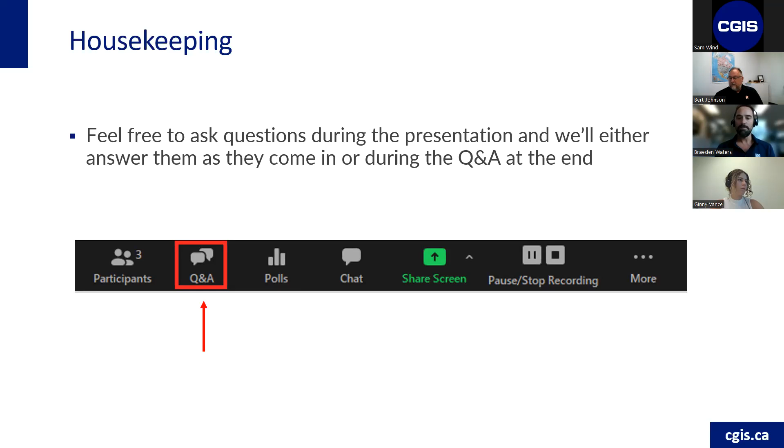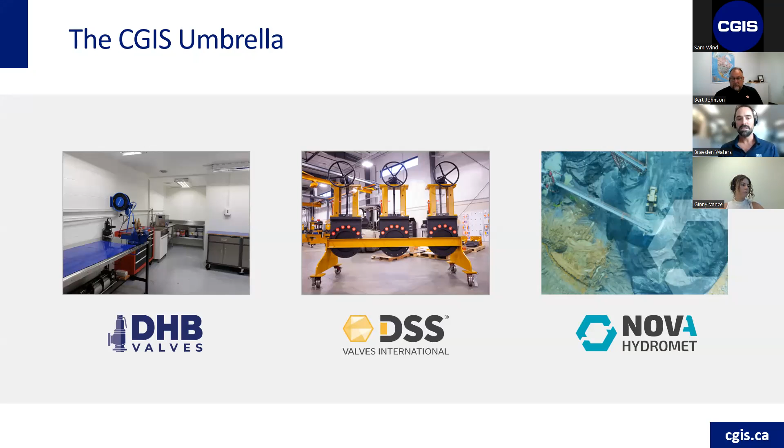Next screen, please, Bert. Just a little bit about CGIS. Our vision here at CGIS is a world without valve problems. Within our mission statement, we look to be the trusted control, isolation, and automation valve partner, and the recognized leader in providing powerfully intelligent solutions to our customers' severe service needs. Further to that, we look at delivering superior reliability and significantly improving customers' bottom line safely. I think safely is one part that we really want to focus on in today's presentation with the way we approach our customers. So this presentation will definitely look at some safety aspects with valve operations, and we'll be focusing on that. Next slide, please.

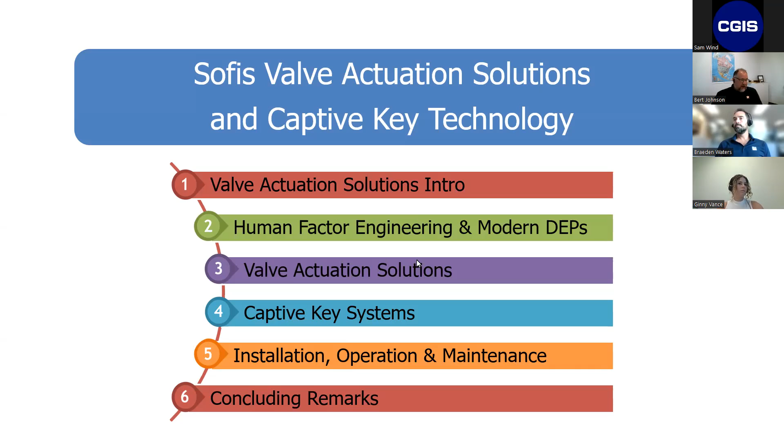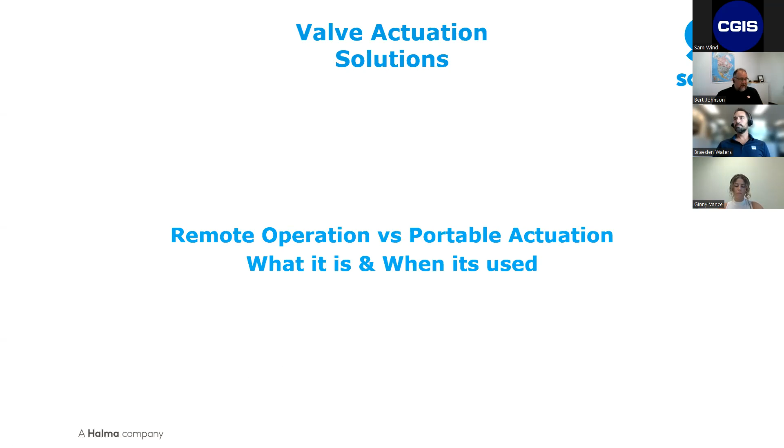The first thing I want to say is that there are two different veins on our drive system applications. You've got remote operation, which is moving the operation from an unsafe or ergonomically unsound location to a safe or ergonomically correct location. And then there's portable actuation, which is actually physically actuating a valve easier and making operations a little easier to operate that valve.

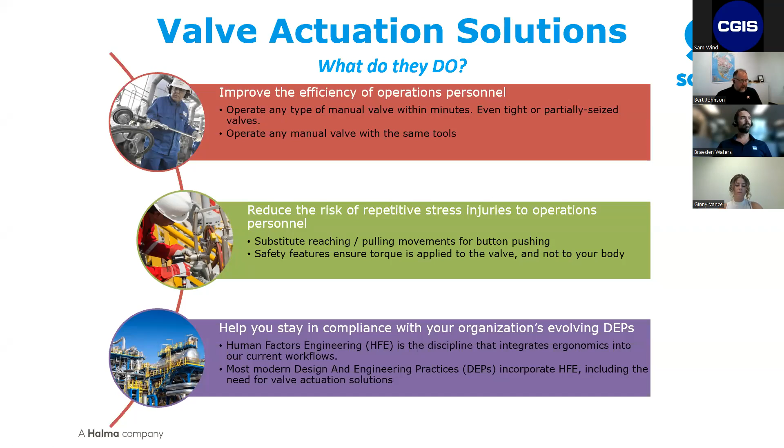What does this technology do? It improves the efficiency of operating personnel and reduces the risk of repetitive stress injuries or awkward position injuries that could come into play. It also helps with the changing workforces, with everyone evolving their design and engineering practices around human factors engineering and some of the other current buzz terms in the industry. This helps create alternatives to that kind of application.

What are the current DEPs?

Everybody has a standard, and I'm sure within your respective companies and organizations, there is a standard practice for operation of different things, whether it be valve or ergonomic use of space. In some cases, it's even as simple as how desk components are set up. But what we do is we take that and we utilize it in an industrial marketplace.

In some of the DEPs that we have reviewed, valves are set up as critical, set up by their criticality, which is related to the frequency of operation, the criticality in the operation, and the size and need of operation of that valve.

In that, people will determine whether it is a very critical valve, which either needs a direct dedicated actuation device, or whether it can be used with a portable actuation device. And then it goes down to where there might be an infrequent operation where there may not be that much of a need.

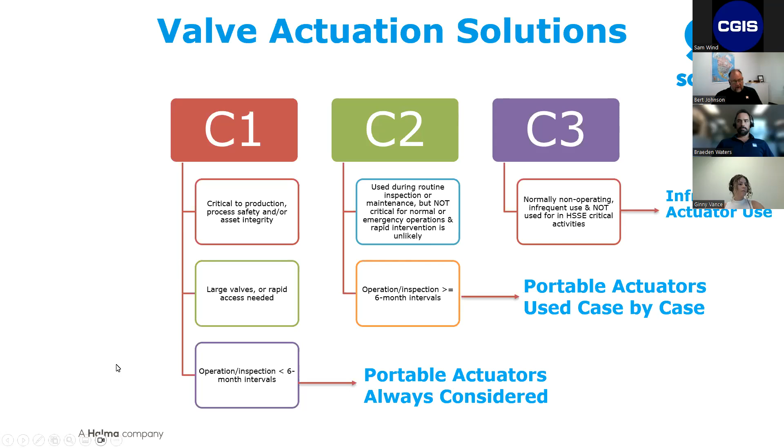One of the things that a lot of people will look at is, and I was raised in the industry, like Braeden said, I've been around since the 80s, and we always operated off of a 100-pound rim pull cracking force or operating force. That is the amount of force exerted on the outside rim of the hand wheel.

All of this information was pulled from existing DEPs, and currently the only way that you can get the 100-pound rim pull that's listed here is only when you're breaking that valve off the seat. Once you start operating it, then it is suggested of a 33 pounds of force applied to the outside rim. This at first caused me a little concern because it seemed extremely low.

But if you put that in the perspective of what your company has as a minimum solo lifting weight, most facilities use 50 pounds as their guideline. So when you put a 50-pound limit on how much you lift, then it makes more sense to put a 33-pound limit on how much force you can exert on the outside rim of the hand wheel.

There's also mention in some of the manual valve design and operations and process of how many turns you have to utilize that. Most people look at 100 rotations. So if you've got a valve that exceeds the amount of force you can apply, but you put a 10-to-1 gearbox on a valve with 40 turns or even 20 turns, then you've just exceeded that number.

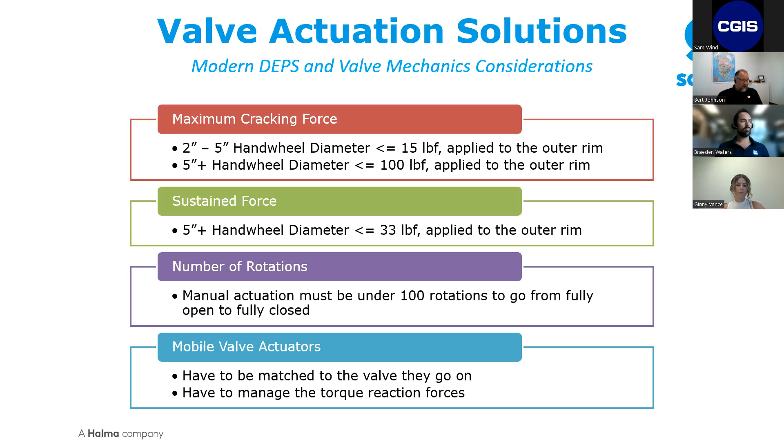And then how you manage any torque or reaction forces is also critical in that piece. What you will see, and again, this came out of a physical DEP from a major player in the industry, we are looking at only being able to exert 33 pounds of force on the outside rim of the hand wheel when we are actually following it through.

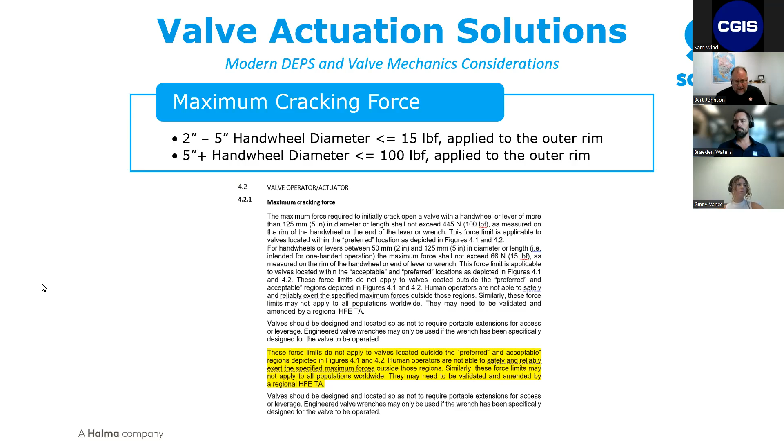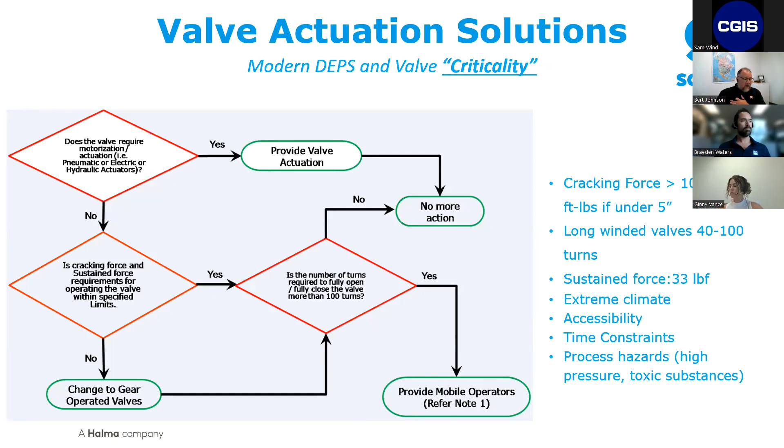One of the other pieces we look at, and I don't know how every other customer is done, how your specific sites are done, but a lot of people are starting to move away from the concept of chain operators because of an inherent risk of either being directly below the valve itself, or having to deal with the potential of the chain operator to fall off or slip, or any number of things. So people are starting to move away from that.

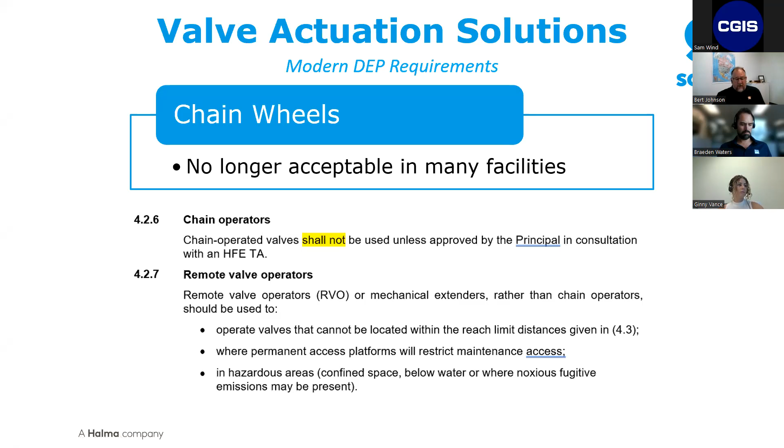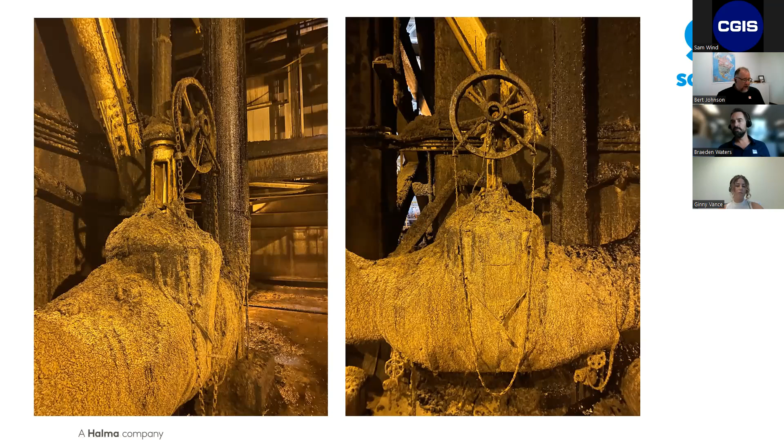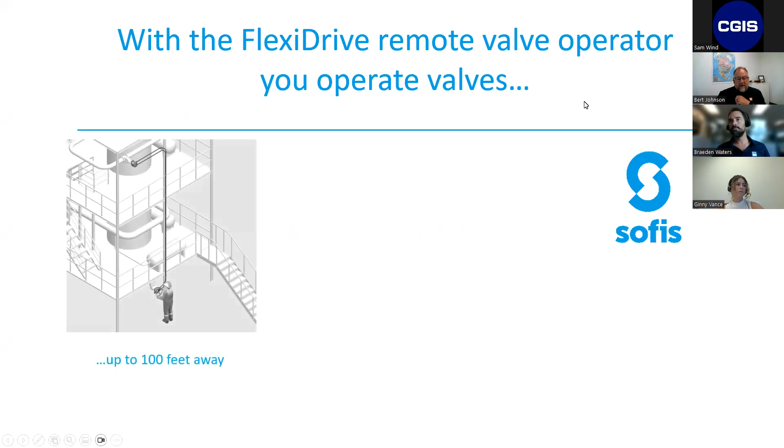The FlexiDrive is actually an alternative to the chain wheel. It doesn't replace every chain wheel that you've got, but it does give you an alternative that allows for you to get out of the potential harm's way. We can be up to 100 feet away. We can go through walls and other types of barriers. We can even have submersible where you are below grade, which in a lot of cases you don't see the capabilities of a chain wheel to be able to extend to these other applications.

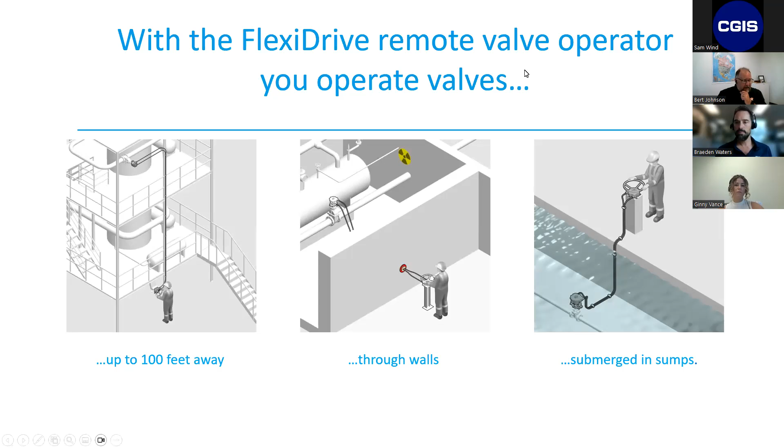This piece of equipment is made up of three main components. You've got your operator station, which is mounted in a location of your choosing that can be either on a pedestal, on a concrete wall, on a handrail, wherever it's operationally convenient to the operator to be in the proper ergonomic position, as well as out of a splash zone or harm's way of any kind.

And then you've got the valve station, which is a direct mount onto the valve, allowing for that operation. Essentially, we are replacing the hand wheel for that operation.

Then you have what goes between the two, which is a flexible cable. It is a helical cable. The easiest reference I've always had is boat steering - there's a Teleflex cable that goes between a center console and the rudder. What this does is the same thing as fly-by-wire or drive-by-wire technology.

It is a direct link back to each other. And this is a much more robust and sturdy cable that allows for operation in an industrial environment.

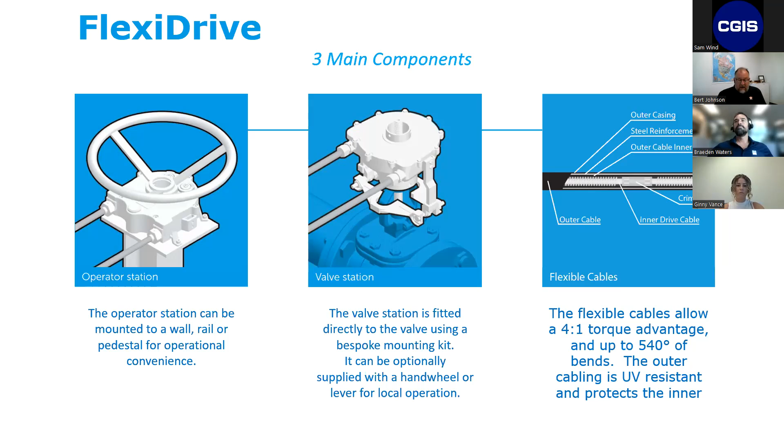We do have indication, which if you are not in line of sight of the valve, you will have an indicator on your operator station that allows you to know where that valve is in its position.

Everything is fitted in a bespoke manner that allows for almost a belt and suspenders, because essentially what we've done is replace the hand wheel and fitted the operator station in the exact same way the original hand wheel was, whether it's with a nut or some sort of a bolt-on assembly. And then we also have an additional assembly at the bottom that allows for a belt and suspenders type application.

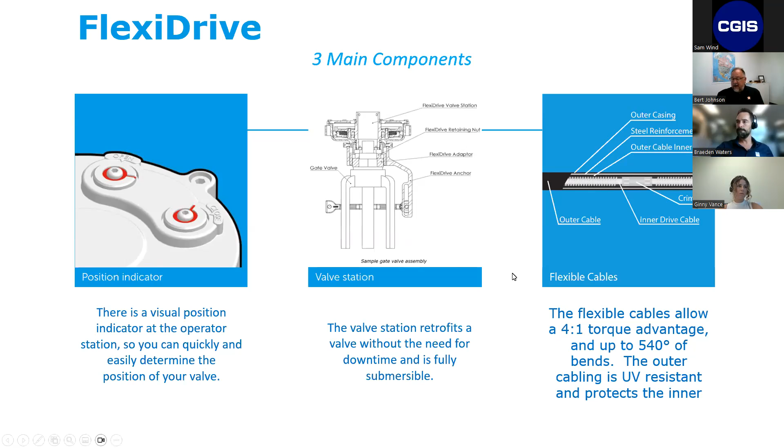This next slide will show you essentially how the FlexiDrive operates.

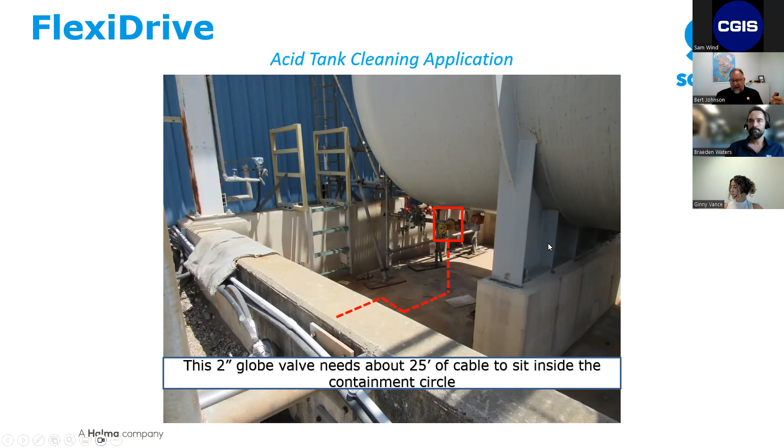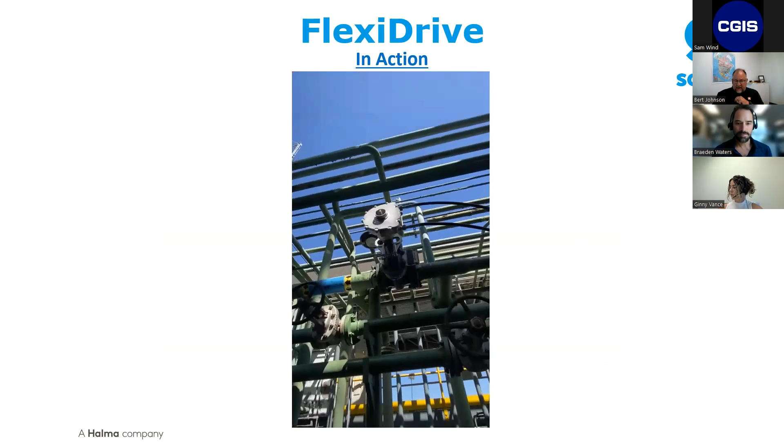And you can see the cable is wound. It's not intended to be cable tray neat. It's intended to be free flow. Valve's going in the open, but it allows that operation.

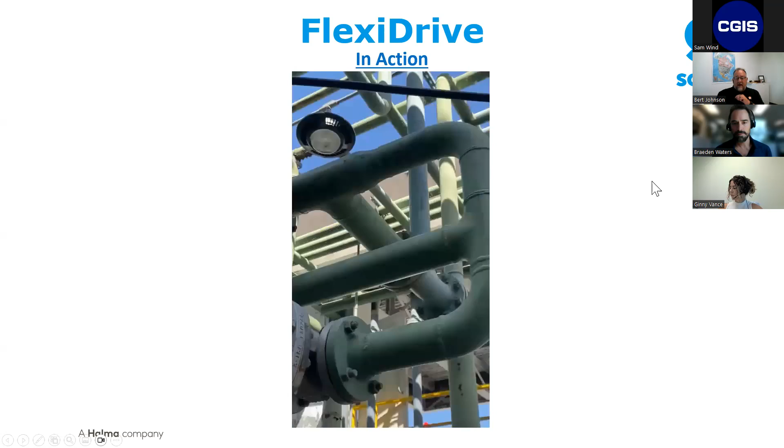You can see how sturdy that is on the valve itself. There is no flexibility that it would indicate that it could fall off at any given time. And that's how our FlexiDrive operates.

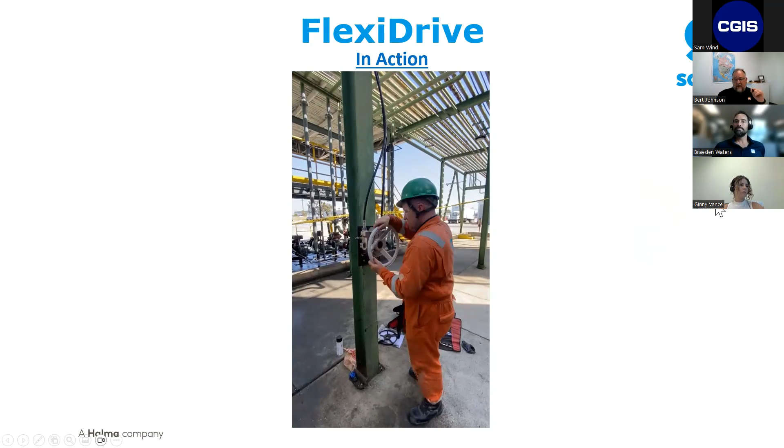What we'll jump to now is that was remote actuation. That was the operating principle that gets us to move the operation to a safe or hazard-free area or ergonomically safe area.

What we're going to move now to is what we call portable actuation. These portable actuation devices, for valves that inherently don't meet the criteria for dedicated actuation, what we can do is make it a little easier.

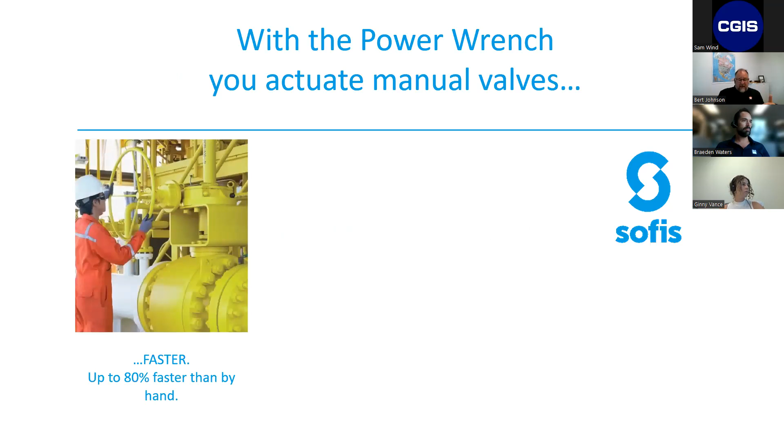And what does that look like? That means that a single individual can operate a valve with a much quicker operating time than anything else. There's no need for cheaters, chains, helpers, and it's a single man operation.

With our power wrench, you can see that it's set up as a safety mechanism because there's a dead man switch in the center, and then there is a throttle on the end to allow you to control the air supply going through the tool.

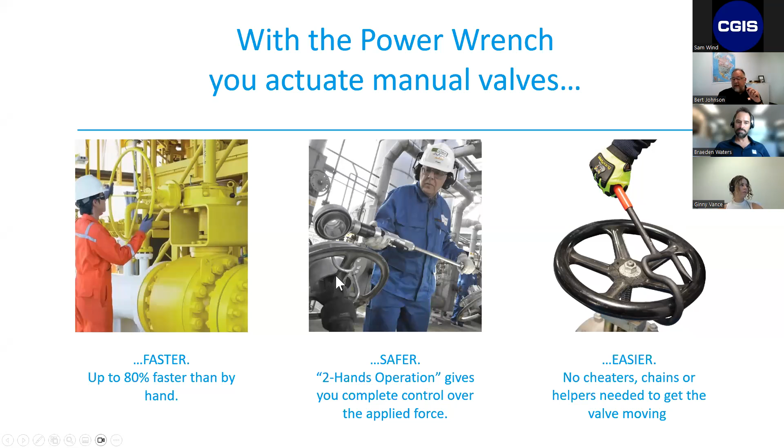So what that does is ensure that you are in a proper stance and properly prepared to operate the power wrench. And the power wrench, you can see right here the very tail end - this is what we call our drive plate adapter, and it is a simple bolt-on to the existing hand wheel.

And this is what it looks like. And again, we have a few different sizes depending on hand wheel dish, hand wheel size, and stem rise that allows us to accommodate different applications.

And so there's your operating mechanism, and that's all it takes to operate this piece of equipment.

Then you have your protection skid or a filter regulator lubricating pack, which has adjustable air supply. You can hook up plant air to the outside edge, and then you can adjust that air supply to be able to operate that piece from there.

And then you have the tool itself, which comes with a hand guard and protection items to help ensure safe operation of the tool. The tool is capable of putting out close to 400 foot-pounds of torque, although on most manually operated valves, 200 foot-pounds is usually the listed requirement that you would need.

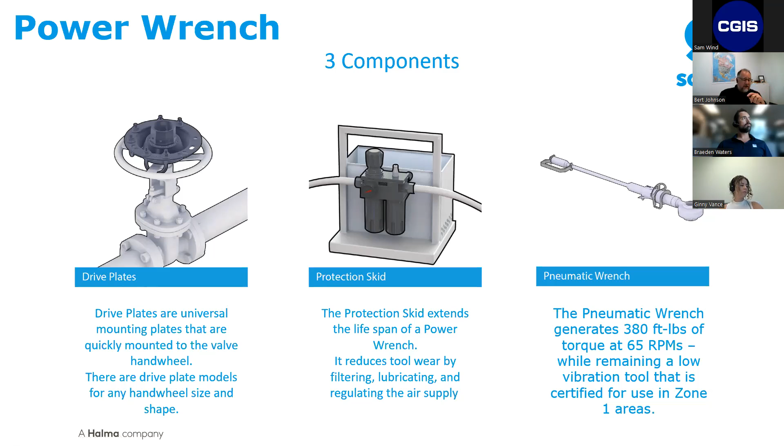Sam, if you could go ahead and do the second question, because it really could apply to both the power wrench and EasiDrive, since it applies to our drive systems and making life easier for the operator.

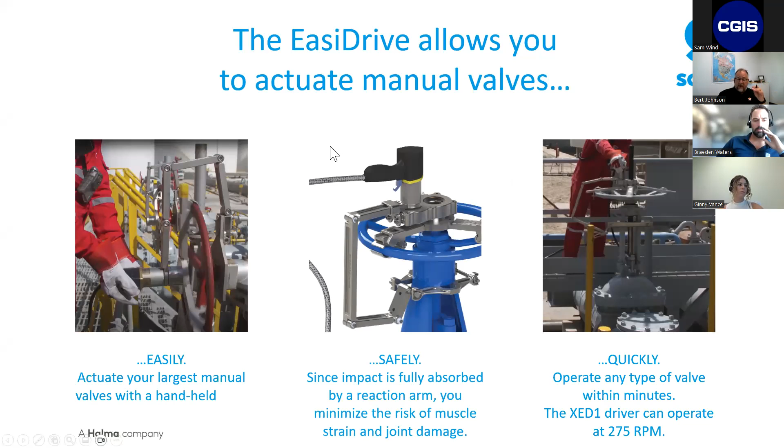But what we've got is the EasiDrive is a more identifiable, easier application because it has a reaction component built in, and it's as simple as carrying a hand tool, similar in size and functionality to an impact wrench, but with some safety aspects built in, out to the valve and operating it quickly and easily through various operating mediums, including electric, battery, and pneumatic operation.

Here's how it works: the reactive components come into operation when the valve reaches a stopping point or exceeds the torque the tool is set at. Rather than those reactive forces going into an operator's arm, shoulder, or other body part, they're reintroduced into a stable, secure location so there's no risk of injury to the operator.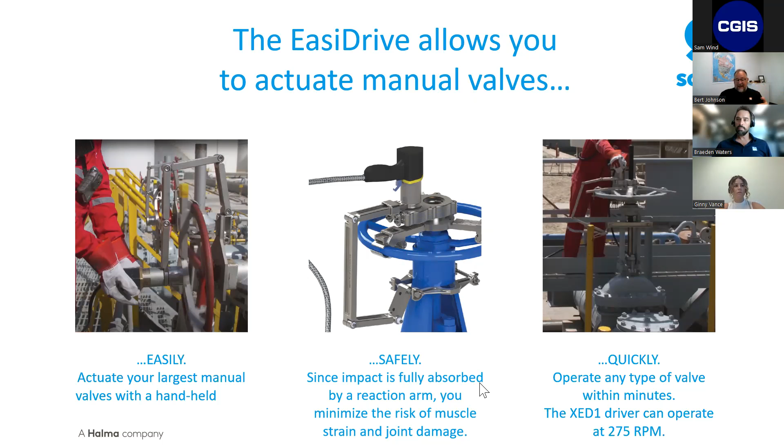We normally see this used in applications where detailed engineering didn't call for a dedicated actuator, but there might be a requirement where two or three operators have to go out and operate an individual valve. So this takes that operation and simplifies it considerably.

The tool can be mounted either directly onto the top of the valve, or we can fit it to the hand wheel, a gearbox, or whatever piece is necessary. The key is having this reactive component installed so that should the tool seize up for any reason, all those reactive forces are exerted back into the valve, making it a safe, single-handed operation for an operator.

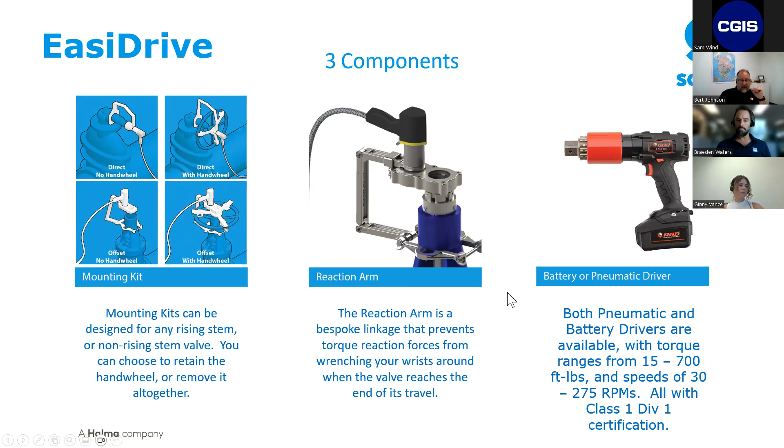We can exert up to 700 foot-pounds of force with our pneumatic tools, and up to 500 foot-pounds through our battery tool. Our battery tool is currently certified by the manufacturer up to Class 1 Div 1, groups A, B, C, and D. The next slide will show you how the EasiDrive works.

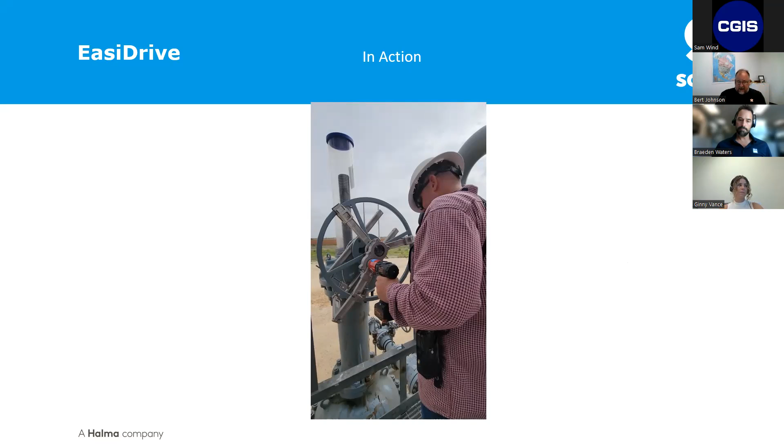This is a one-man operation, and you're not going to see the full operation here, but it would be a much shorter operation than doing it by hand. That's what we try to do - make the operation of these manual valves, which are either high torque or have had the torque lowered by an auxiliary gearbox, easier, even though it still increases the number of turns, so you might have a great deal of turns on that valve.

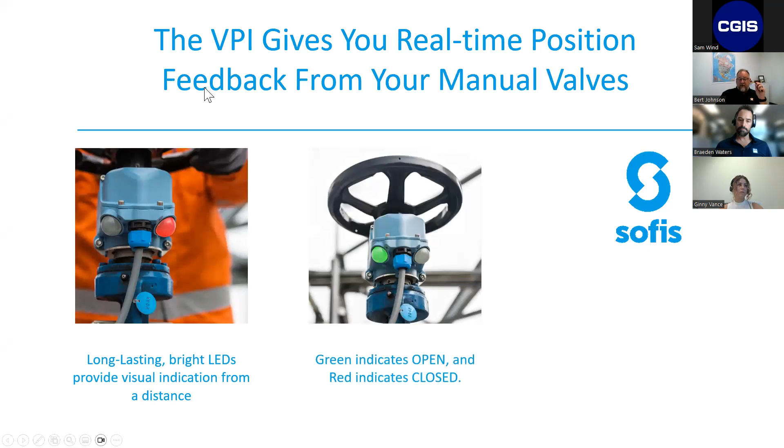And this is the last piece of what we call our drive solutions - our VPI, which is our visual position, valve position indicator, designed for multi-turn valves. What it allows you to do is, without having to put separate targets on a stem or any of the other...

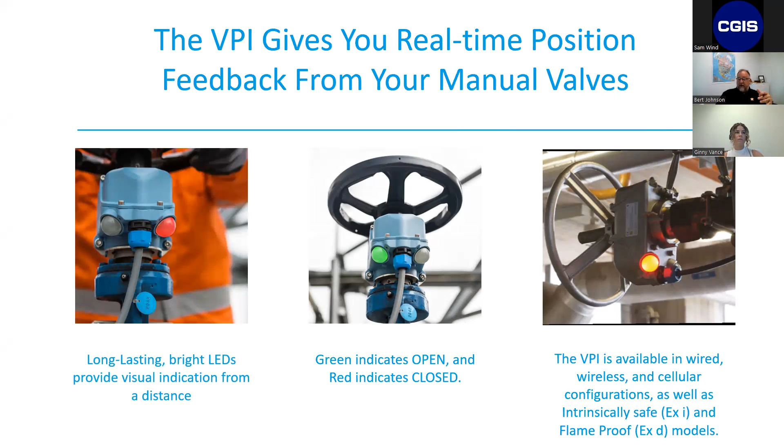...creative engineering that's been necessary in the past, this allows you to mount a single piece of equipment onto the top of the valve and retrieve indication back on the operation of the valve. It comes in either aluminum or stainless.

All of the switches we can provide - I believe we've got up to 14 different switches - carry full certifications. The box is a general watertight box, but we can add an explosion-proof junction box at the bottom that would allow it to fit in any application you might need.

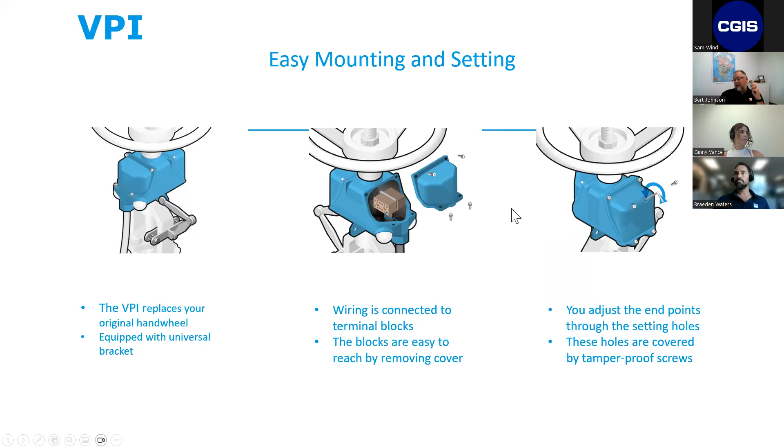Now we're going to step out - sorry, Bert, just one quick question came in. How long does it take to set up the EasiDrive mechanism?

The EasiDrive mechanism - I have done this as a demo, and I know some of the CGIS team has been doing some demos lately with some of our equipment. I've gotten to where, with my kit, I can usually set it up in 30 to 40 minutes on a valve.

The intent is that when you use that technology, you'll have an adapter kit for every valve that's critical to you. You might have one or two extras that you can install for turnarounds or something like that. But the intent is that all of these adapter components are already there, and the operator just needs to walk up with the tool and operate the valve.

It usually takes about 30 to 40 minutes to install the reactive component onto the valve. I hope that answers the question for whoever had it. Perfect, thanks. The next piece I want to jump into is moving to our process control.

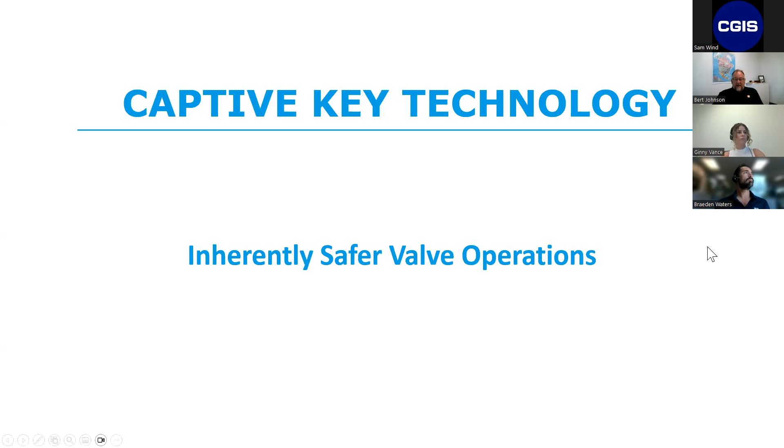What this concept does is take a manual process and control the operation, whereas lockout tagout, or a standard car seal or LOTO program, allows for operational control of a single valve. What this technology allows for is process control over a breadth of valves that can be up to 10 or 15 valves long or more. The level of control is up to the site specific persons.

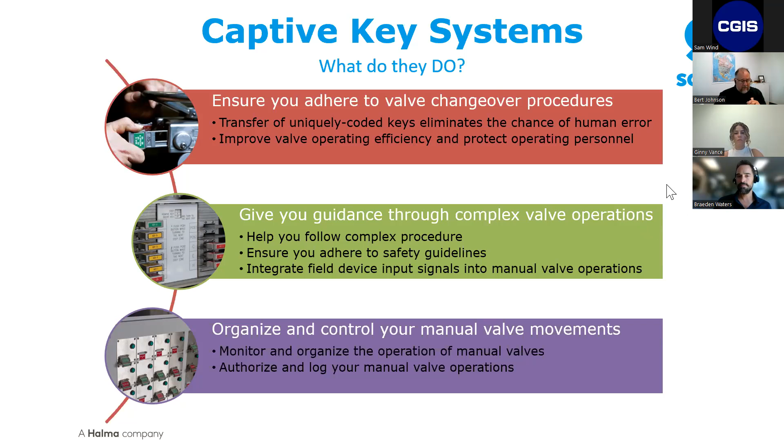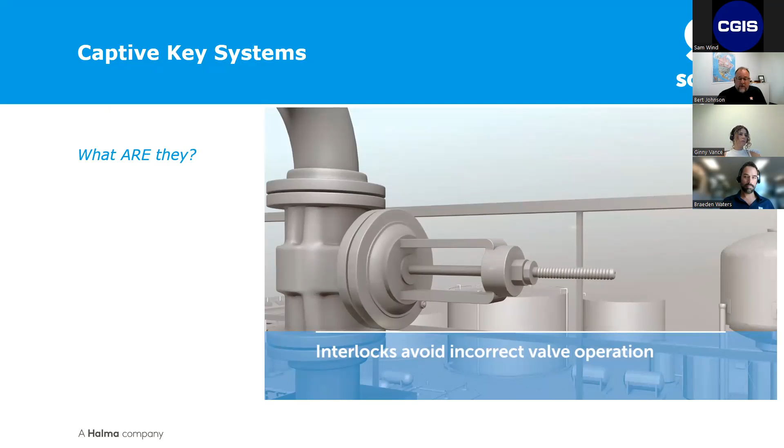So what we do is install devices that allow for control of that application. This is what the item looks like, and this is how it's applied. There are two keys, and the design is simple: at one end of travel, one key will come free. At the other end, the other key will come free, and that key will transfer to the next step in the process. You can't start that process without a permit to work that comes with the operating key.

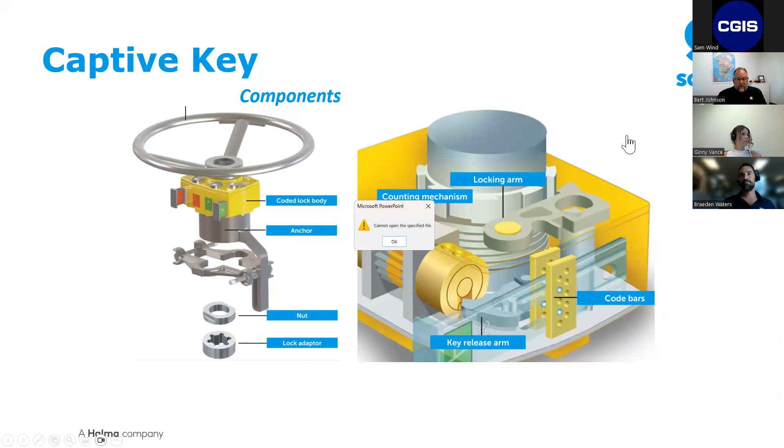And where this becomes very useful is in layers of protection analysis, because everyone looks to mitigate risk. This is where you begin mitigating that risk, utilizing this type of equipment to mitigate your risk in that operation.

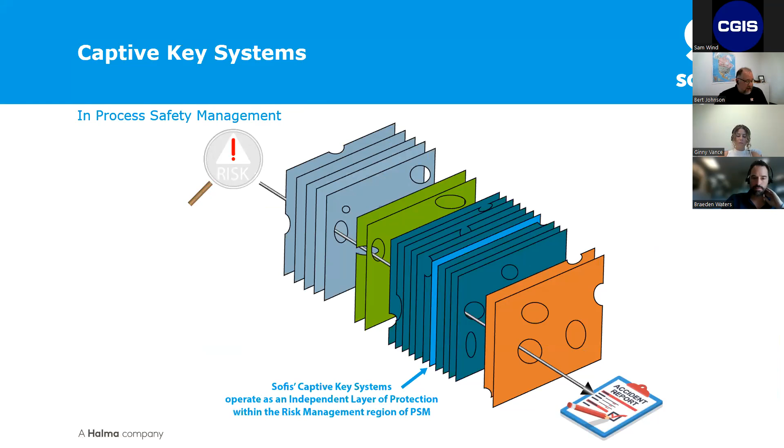If you are looking at the hierarchy of risk elimination, the ideal would be to eliminate the risk, substitute for the risk, or isolate the risk. Then you've got engineering and administrative controls. You've got full dedicated actuation with electrical interlocks that can be very cost prohibitive, or you've got lockout and tagout, which leaves room for error by human factor.

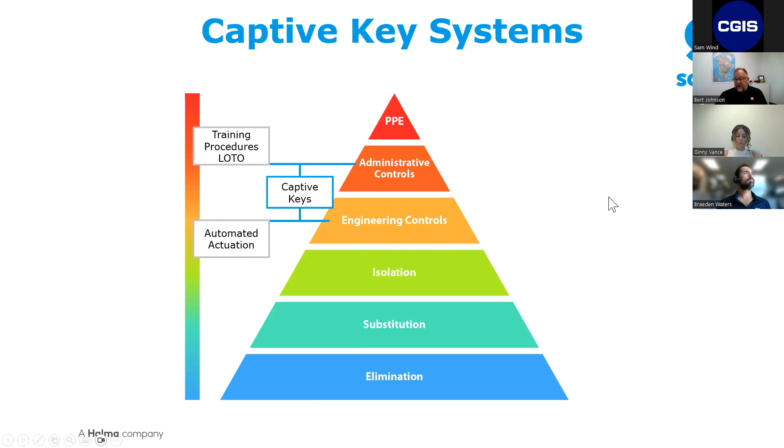What we do is bridge that gap by allowing for an engineered piece of equipment to be put on a valve and administratively controlled. All of this can be found in the initiating events and independent protection layers, or LOPA analysis.

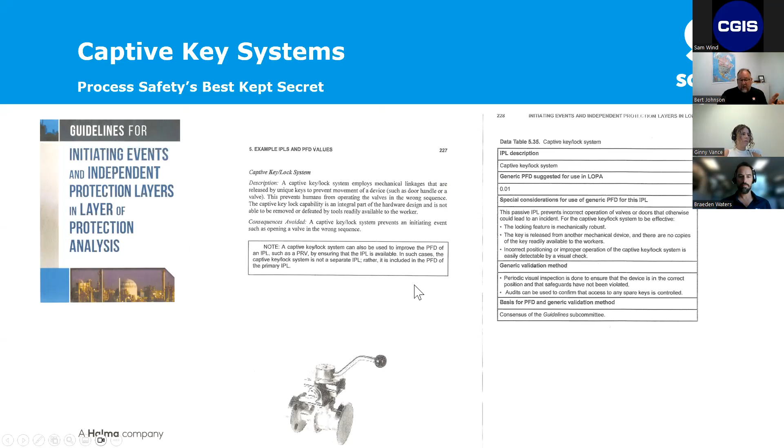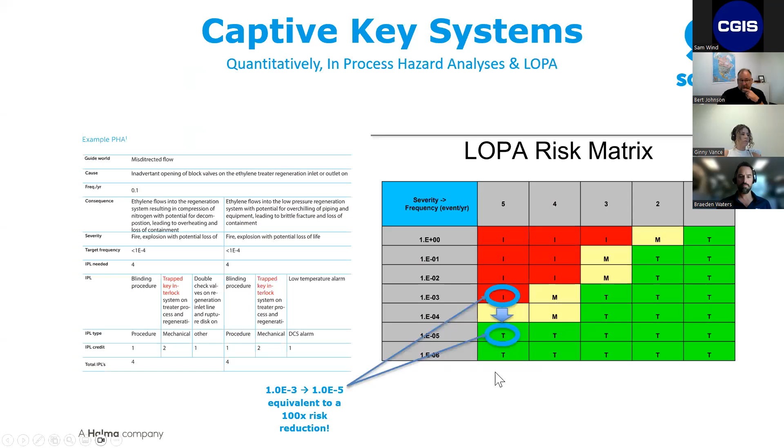This is exactly where our product sits, and it allows for two layers of protection, which means a multiplier of 100 based on your application. If you look at the risk matrix, we're taking you from one level to allow you to move two levels instead of a single layer. So it allows for two levels of risk application.

Now we've got some of our typical applications globally, and we'll run through this relatively quickly so we can get to any other questions. For PSVs, the worst thing you can do, especially in a dual relief situation, is to isolate both paths of pressure relief. So this product would ensure that you always have at least one path open.

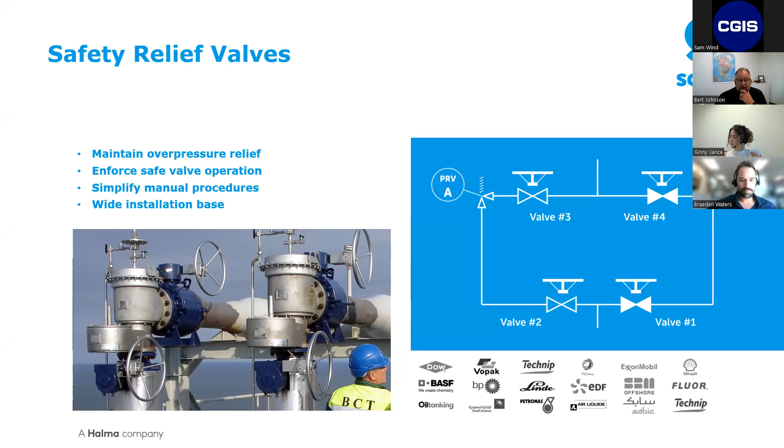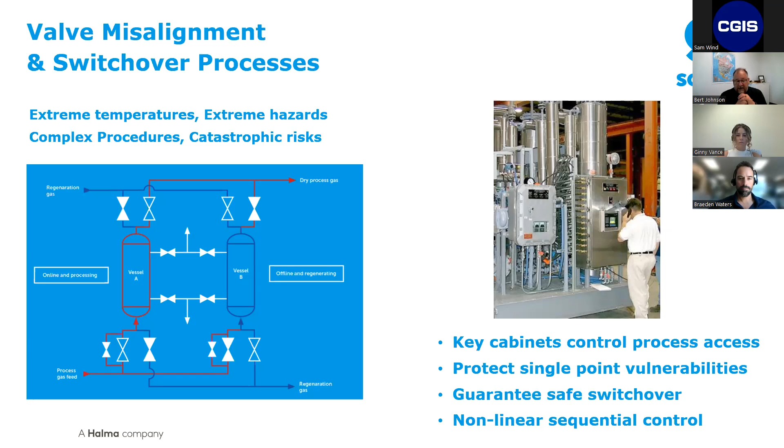We also use this in changeover processes. One of our larger applications recently is when you're regenerating a filter bed, and usually your process application is at a higher pressure rating than your regeneration pressure. So what we do is manage that so that you can't ever be in regeneration and process at the same time.

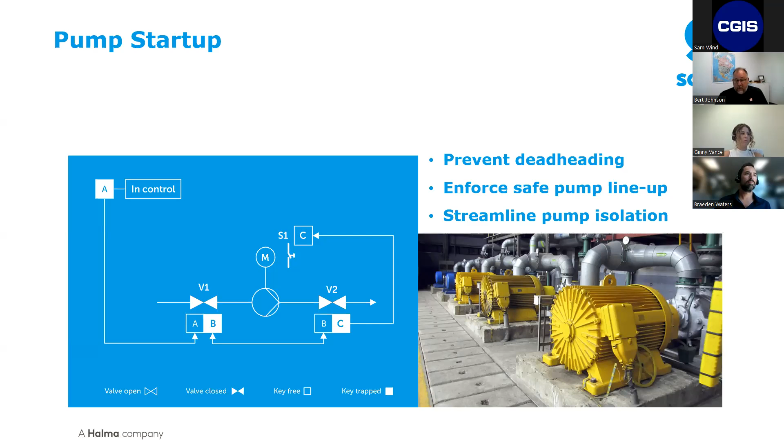In pump isolation, this can be more financial in a lot of cases, but if you deadhead or cavitate a pump, you can burn up the motor, and that becomes very costly downtime. What this product can do, in simple terms, is ensure that your manual suction valve and manual discharge valve are both open prior to being able to turn on the pump.

Same for heat exchangers. We can ensure that the pressure protection is available and set up so that you are never in a situation where your heat exchanger will exceed the necessary pressures it's designed for.

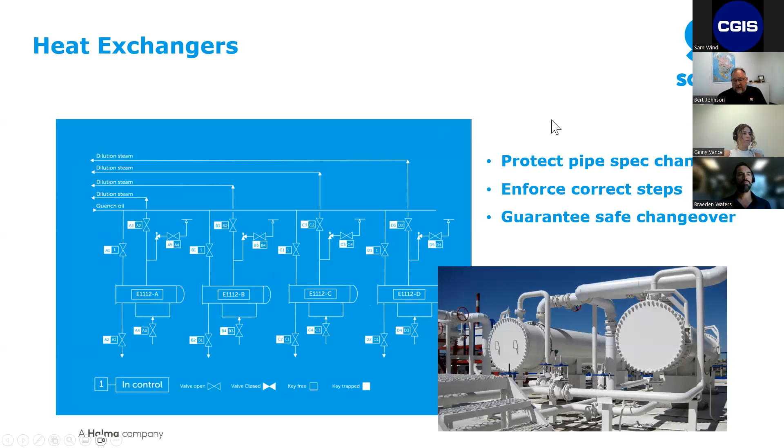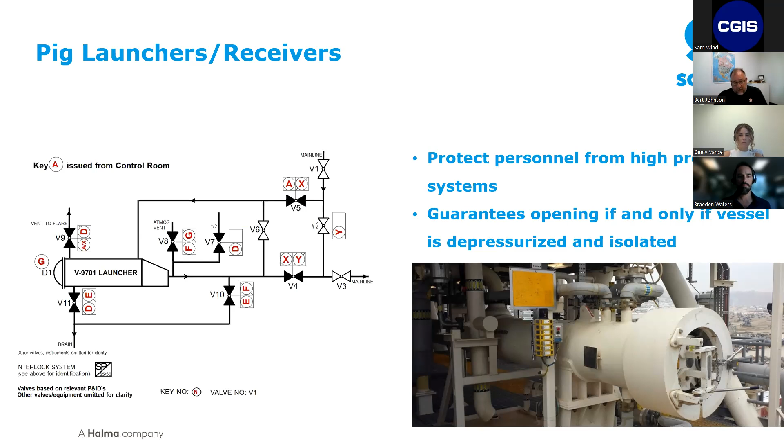Launcher receiver applications: the worst thing you can do is open that vessel under pressure. This product will guarantee that everything else has been isolated and that it is fully protected prior to gaining entry into the vessel itself.

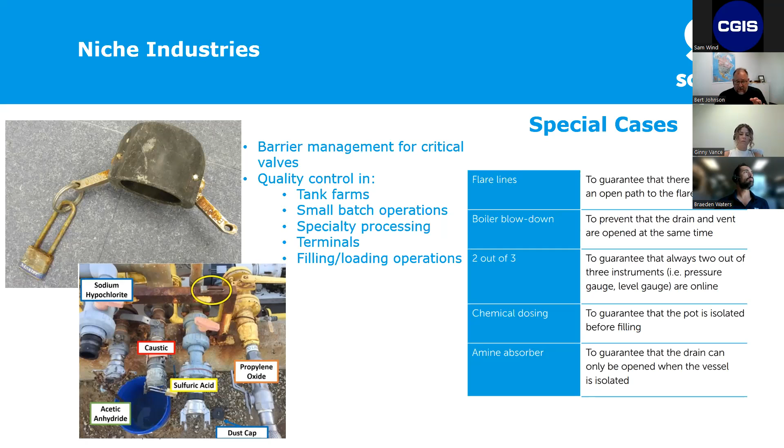Or in small batch operations - I was actually on a call this morning where the customer is taking ethylene out of tankers and trying to ensure their path is always set up correctly. Someone had gone out and turned the wrong valve and created an incident - this is actually out of a study done by the Chemical Safety Board. What we can do is ensure they have to go to the correct valve to perform that operation.

The beauty of it is all of this can be done without any additional piping or engineering. It's a simple guideline based off your P&IDs or your standard operating procedures, then a collaboration between ourselves, process, operations, and maintenance, to ensure the system we provide meets all the goals of all parties involved.

And then it's as simple after that as replacing the hand wheel on the valve, which our team is very capable of doing.

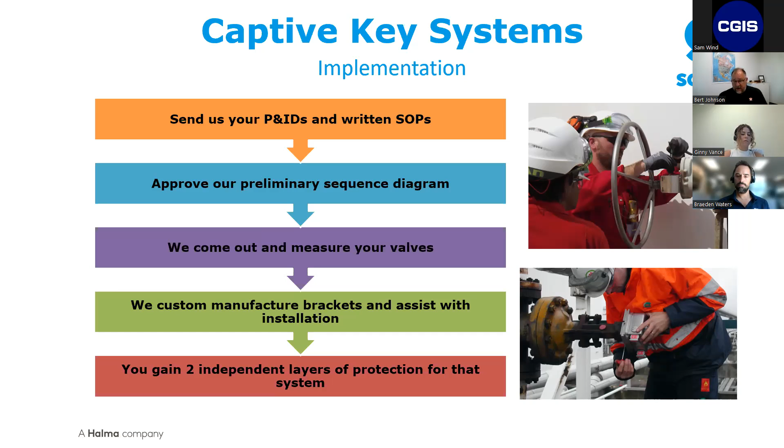So that's really, in a nutshell, what we do as Sofis. Our intent is to make sure everybody gets home safely, that there aren't any inherent risks built in based on manual operations or process operations. I breezed through that because I was concerned about time, but are there any questions?

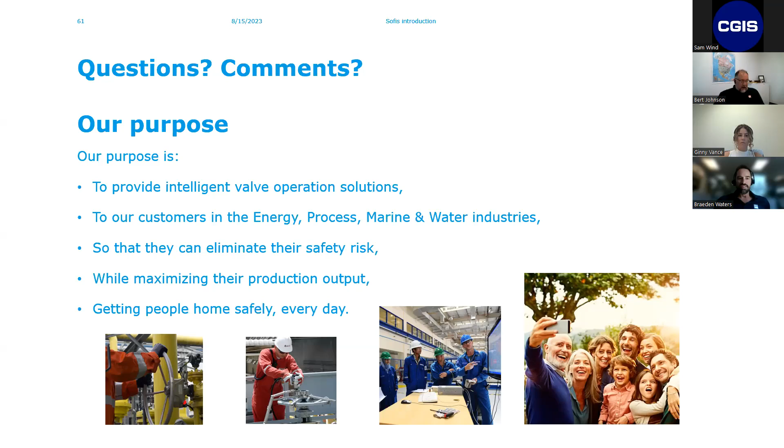Thanks, Bert. I can ask you a couple questions that came in. One - we answered this one, but can I install my own FlexiDrive? Yeah, the FlexiDrive is designed to be self-installed.

What we normally recommend is utilizing the service team with CGIS or our direct service team for initial installations - first time through, let's say. That way it becomes on-site training for somebody in maintenance to install the next one. But as a general rule, yes, it's designed to be installed. We've got a very comprehensive IOM that walks through every step of the way.

I'm going to chime in, Bert, if that's okay, and be the lame one in the room - but if you do not use either a Sofis technician or the fine folks at CGIS to install and set your FlexiDrive, we can't guarantee that the open and close indication is going to be correct, and we also can't guarantee that your tension is going to be correct. What that means is if you decide to install it yourself and something goes wrong, you might be a little more liable for it. So we highly recommend that you use CGIS for the measurements and the installation.